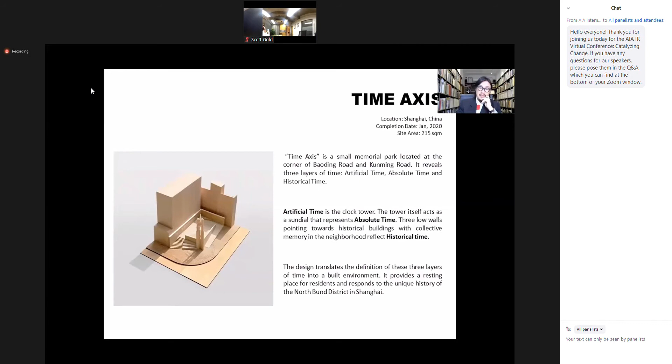The government decided to take action and take back this piece of land, which belongs to the public but was illegally occupied by some private interest. So they took over the land and cleared the site for us to do something with it.

The district government gathered a survey and asked the residents what they wanted for this corner lot when it was handed over to the government, so the residents voted for maybe a free parking space, maybe some resting area. So they approached us to come up with a proposal for how to better utilize this corner lot.

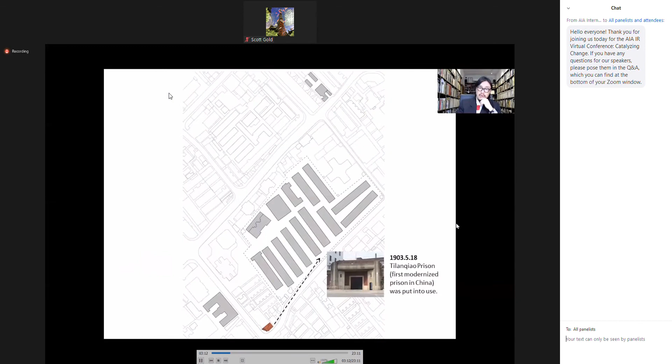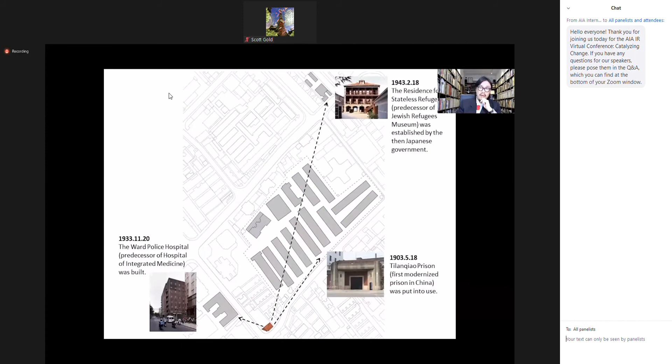It's a very significant corner because nearby we have the Tilanqiao prison. It's the first modernized prison in China, built in 1903. The Ward Road Police Hospital, which was built in 1933. And not so far away, we have the first Jewish refugee museum.

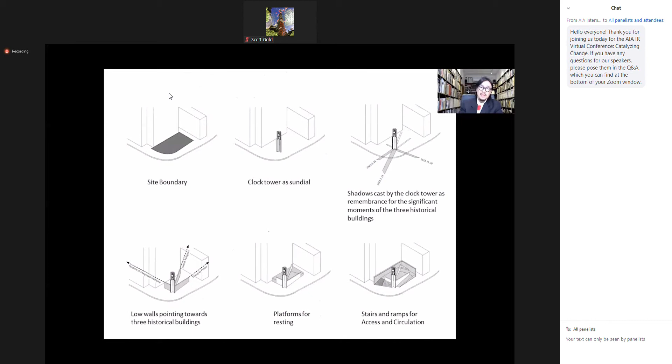I'm sure this drawing has already clearly identified the meaning of the three layers of time I just talked about. This drawing further illustrates the proximity of this memorial park in relationship to the hospital, the prison, and in the distance, the Jewish refugee museum in the neighborhood.

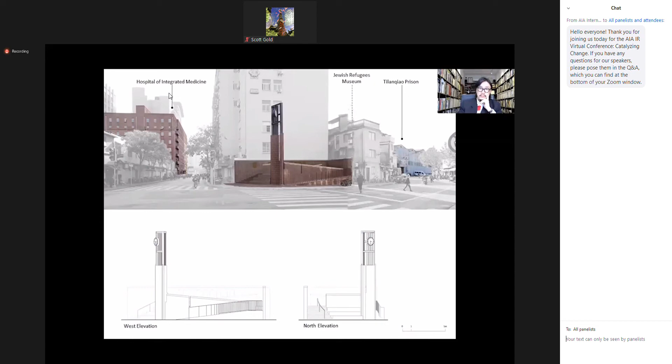One of the things we thought about when designing this, because of the context and the neighborhood, was that brick was the choice of material to build this memorial park. We selected the same color brick that echoes the construction techniques of the nearby hospital and the Tilanqiao prison. So the whole project is clad in brick, and we have not cut a single brick.

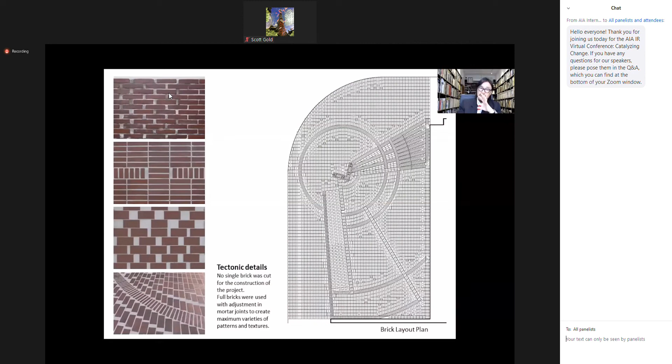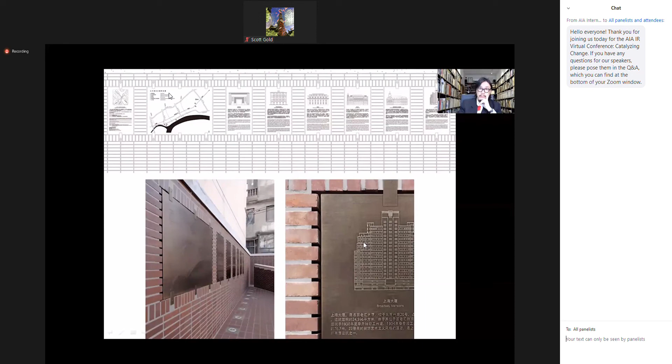The clock tower, as I've suggested, represents both the absolute time, which is a sundial, and the artificial time because of the clock itself. Here on top of these walls, we have cast the important historical dates. On certain dates and certain months, the shadow of the tower would be cast in line with the wall, so that the location of the wall takes on the meaning of both historical time and absolute time.

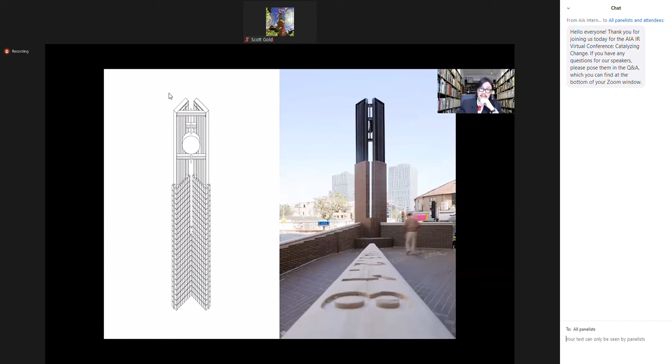You can see one of the residents deciphering the meanings of the numbers on top of these walls. Now it becomes a public park with a recognizable landmark, an anchor in terms of spirit for the local residents within this neighborhood, and we are particularly proud of this definition or reinterpretation by the local residents. Thank you.

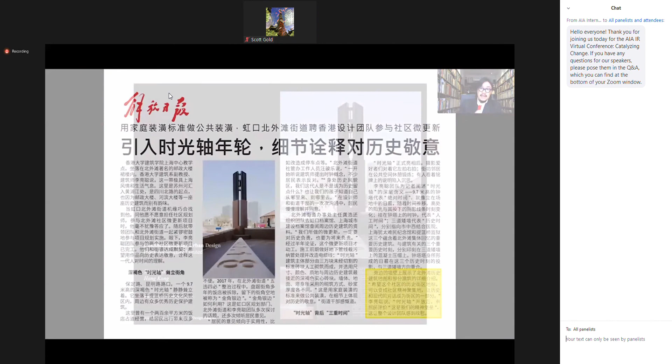Urban design category.